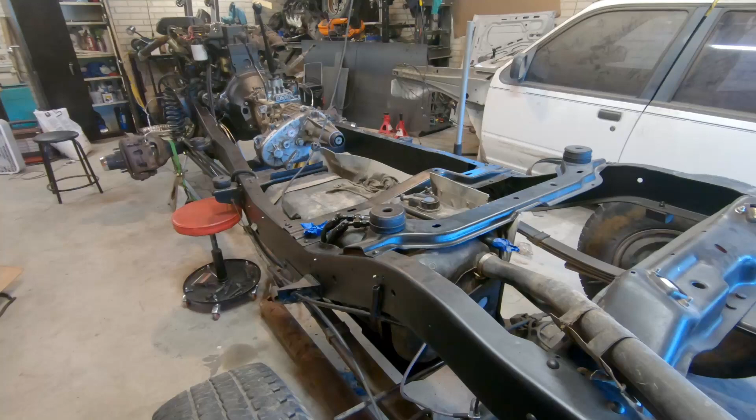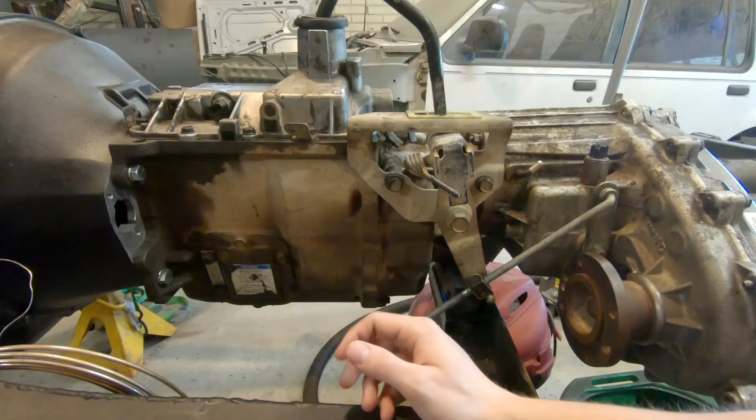This body has been off of that chassis for way too long. I think it's time we reunite the two so it can stop taking up 2 spaces in my garage. I already know there's going to be a couple issues with trying to do this though.

First off, this shifter doesn't quite work. I've got 4 low, neutral, 2-wheel drive, but I can't quite get this all the way to 4-wheel drive. So that's the first problem with this shifter. Second of all, this shifter runs into the drive shaft. There's not enough room here for the shifter and the drive shaft. They're occupying the same space.

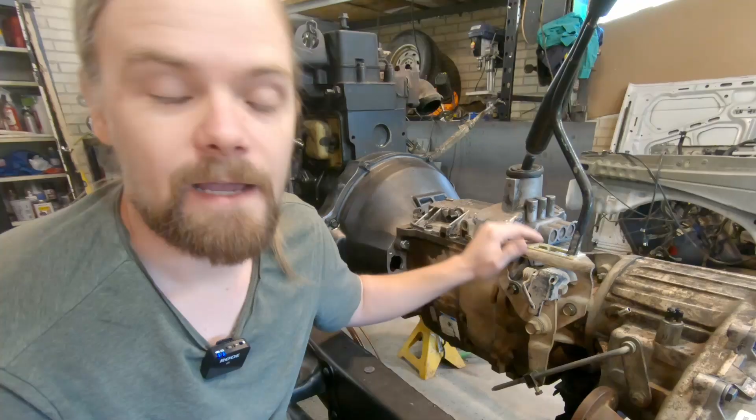So before I put the body on, I'm gonna fix this shifter because it's gonna be way easier to do now than when the whole thing's back together. I could just buy the correct shifter for this transfer case, but I've already got this one and I don't think it's gonna take that much to modify, so I'm just gonna modify this one. What I need to do is find a way to make this shift gate longer so that I can actually put it into 4 high, and then I need to bend this bracket. So let's get to work.

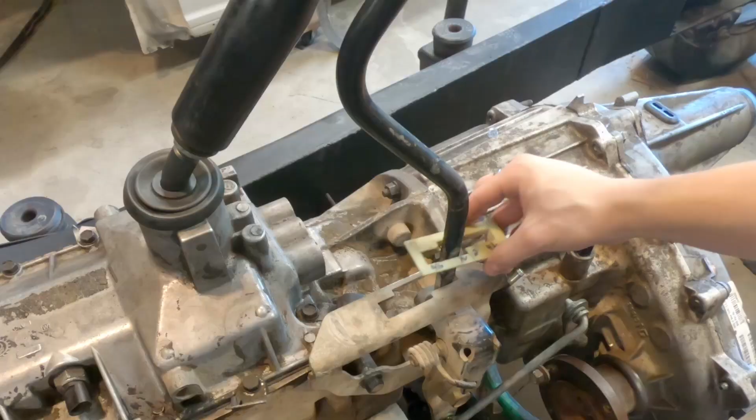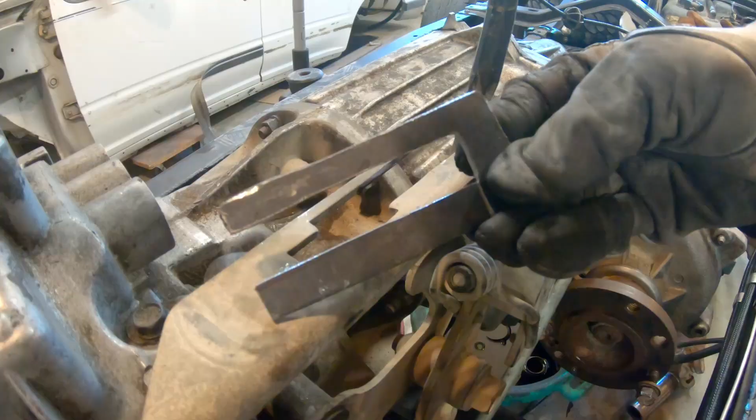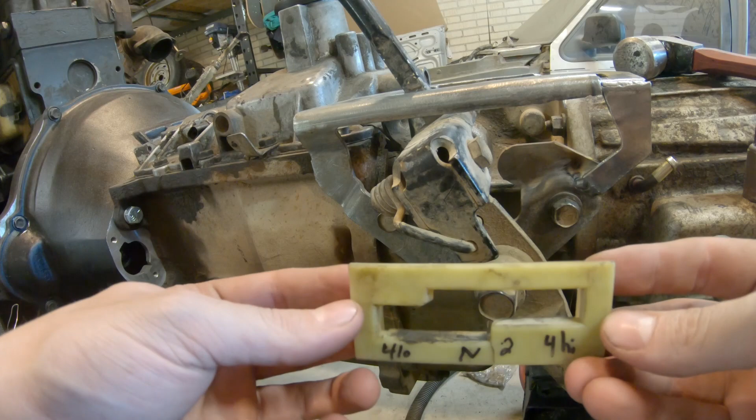Alright, so I welded on a couple new brackets onto this shift lever. The first one just extends this shift gate so that I can get all the way to the shift. And then I added an additional bracket here just to brace it, to make sure it's not too floppy and isn't going to have any issues. It's got a nice cutout in it so that the shift fork can rest in there fully. I need to bend this so that I have clearance, and I also need to look into making another one of these shift gate plastic pieces.

The shifter no longer hits the drive shaft. You can see there's quite a lot of clearance now. I shouldn't have to worry about that.

To finish off this shifter, I need a new one of these. This is the little bushing that when you're moving the shifter back and forth, it runs into this plastic thing so you're not just banging the shifter into the metal the whole time. I need one of these, but with this shift gate being much longer. So I need to figure out a way to make one.

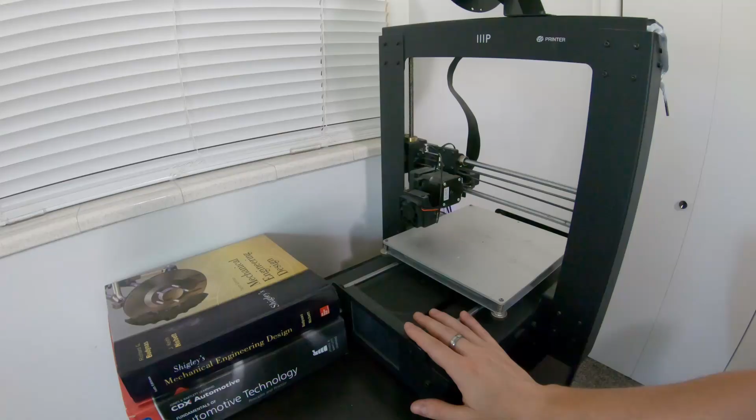And if you've been paying attention, you might have seen that sitting behind me in some of my videos. This isn't just a desk ornament, it's also a 3D printer. And to do weird shapes like this will be the perfect tool to make it.

Now, a couple quick things about 3D printers. First of all, the material that this is using is either a PLA or an ABS. This is really good for prototyping. It's really good for figuring out what shape I want the final part to be and to test it out and make it all fit.

But the final part that comes out of this is going to be made of PLA, and it's probably going to fall apart. In my opinion, a 3D printer like this is really good for making sure that you can get all your dimensions, so you can prototype parts, and so you can make sure your designs work. They're not all that good for finished products unless the product is purely cosmetic, like say a bezel for a screen or a gauge or something.

However, you can fix that. Once you've prototyped the part and you make sure it works, then you could take your models or even take the part you printed and take it to your local machine shop and say, hey, now I want this part in Delrin or some other actual engineering plastic that'll stand up to the abuse.

For my purposes right now, I'm going to print it in PLA and see if it works. And if it doesn't work, then I'll either get it machined, or even better, I can go online and find somebody who has an SLA printer which can print in thermosets and have them 3D print me the part. I might do a full video on 3D printers at some point because I do think they can be a useful tool for the shop, but you do have to manage your expectations as to what you're going to get out of these.

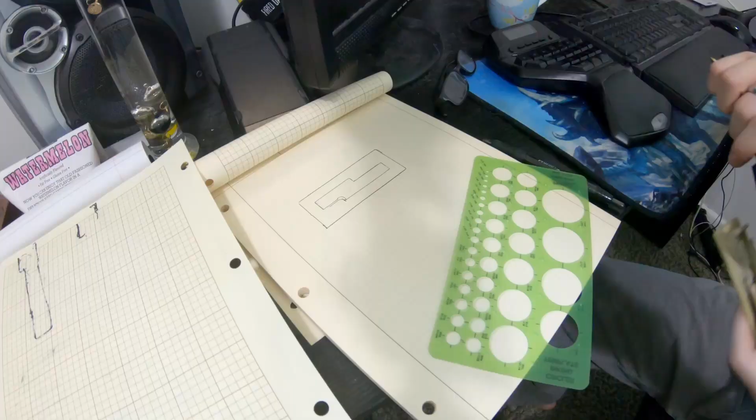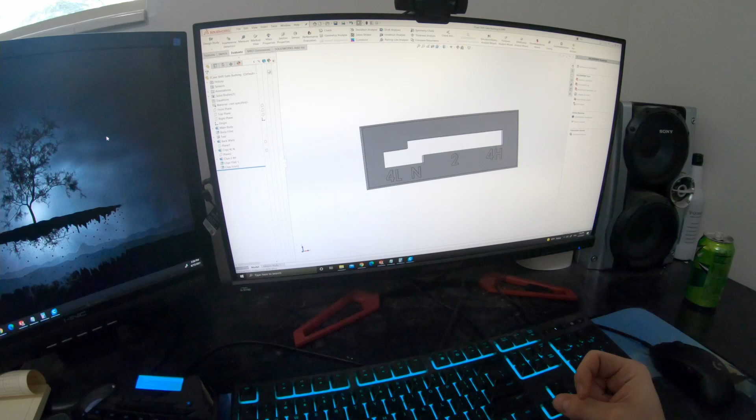So here's my part in CAD. I did it in SolidWorks. I wouldn't recommend SolidWorks because it's really expensive, but I would recommend something like Fusion 360, which is a fully kitted out CAD suite for free for hobbyists, which is an amazing deal. So if you're wanting to get into CAD, that's what I would recommend is Fusion 360.

I don't use it because I have so many hours in SolidWorks that it's just much quicker for me to do it this way. And one of the perks of having to work from home during a pandemic is you get to have nice engineering software on your computer.

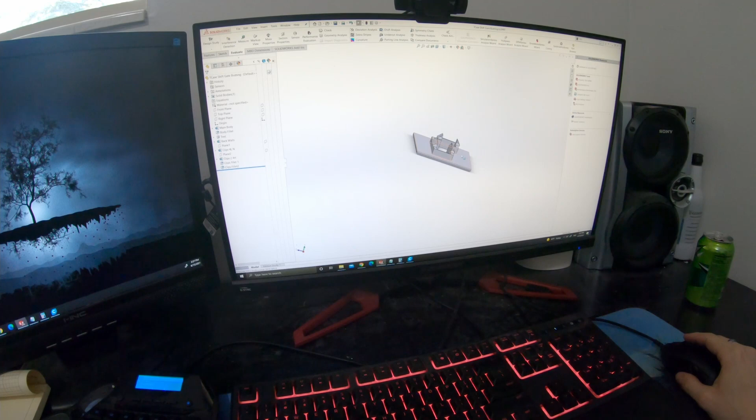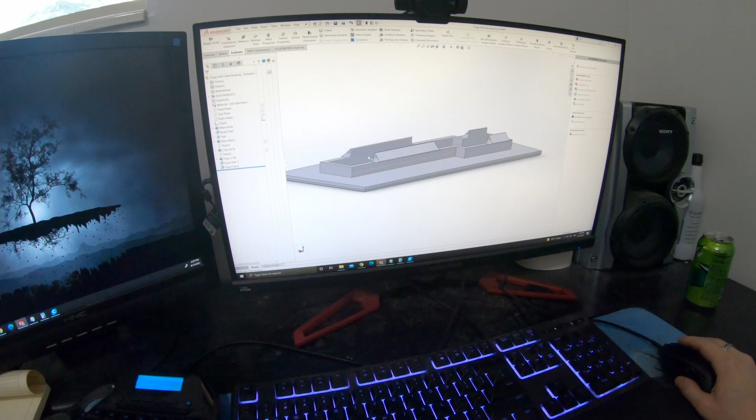So this is the model. You can see I have these little clips on the back. Little clips like this complicate a part by a huge degree. For example, because those clips are there, this would be a very hard part to machine, which means if your end goal is getting it machined, you might want to reconsider the way it mounts. Personally, I'd recommend just putting some holes in it and riveting it to the thing rather than trying to use clips. And the other issue is that you have to account for how rigid the plastic is and everything to make sure these clips have holding power and that they don't fall apart.

This is the part in SolidWorks. However, the 3D printer doesn't understand 3D models per se.

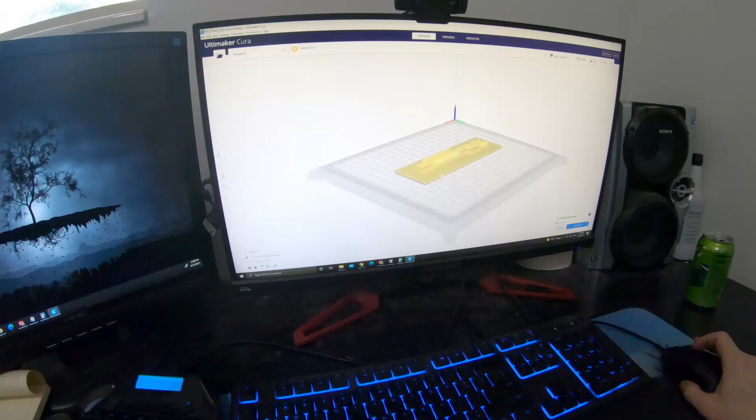First thing you have to do is make it into a mesh, which tells it where all your vertices and lines are, not exactly the shape of the model, and then it can understand that. Here it is in what's called the slicer. This takes the 3D model and turns it into machine instructions for the 3D printer so it can understand what it needs to do to make this part.

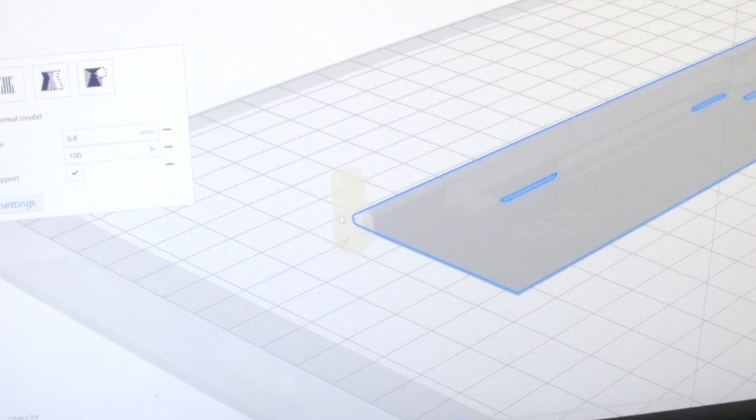The way the 3D printer works is it adds one layer at a time. It'll start here, this is the nozzle of the 3D printer, and it will draw out each individual layer one at a time, just drawing out every single line in liquid plastic. Then as it draws out every line, it adds a new layer and a new layer until you get your finished part.

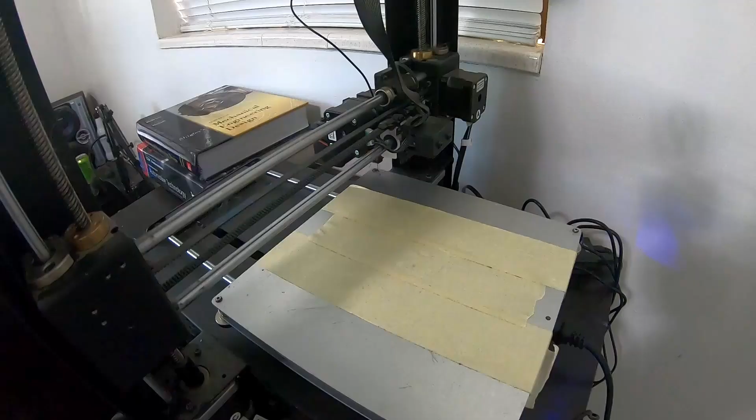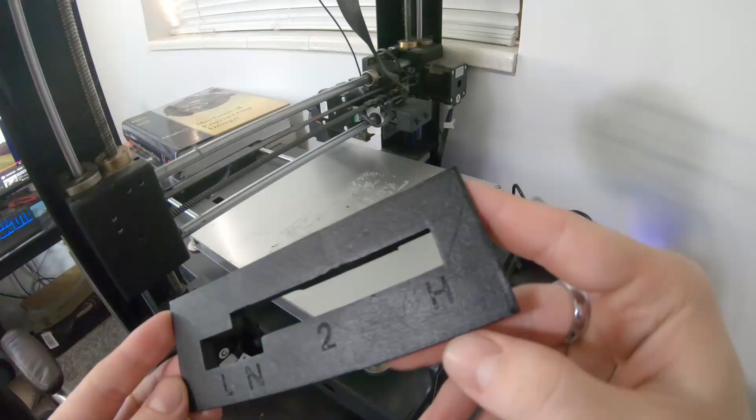Turned out all right. For some reason, the 4 is missing on the 4 low and the 4 high, but I'm just gonna have to paint it on or something, or just leave it, it's fine. You can see the difference between the old one and new one, it's kind of a lot.

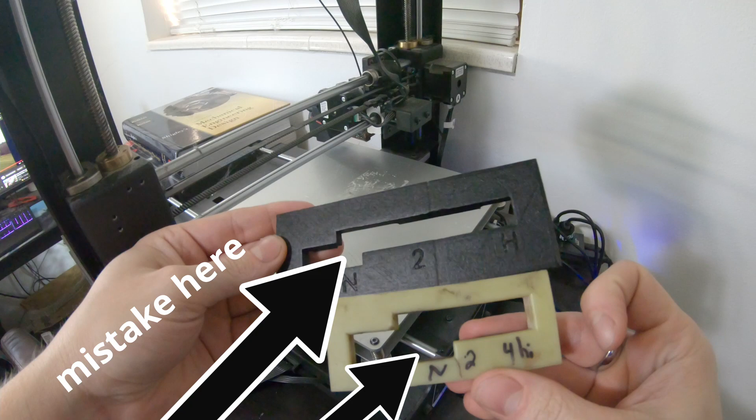All right, back in the garage, and here's this piece. Now, I've already noticed there's a couple issues with it. Like, for example, because of the way I welded on this bracket, there's a little step in the bracket. So I should have put a step in this bushing, but I didn't, so that'll have to come in V2.

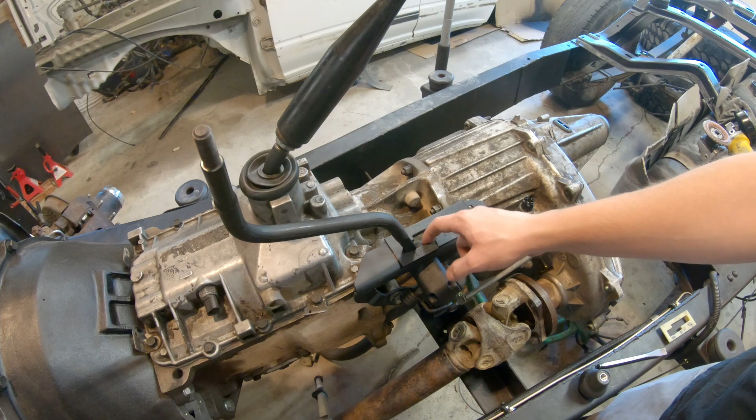Clips in good. All I need to do is reprint this, make this slot just a hair longer, and cut out that section there. This is why 3D printing is really good for prototyping, is because you notice small issues like that, and then you can correct them easily, and spend 50 cents on plastic to fix the issue, and then you know in the end that you have a design that will work properly.

What was this video supposed to be about again?

Oh yeah, the body. Let's start putting the body on. All right, I got the chassis as low as I can. The front, I got the flat tires on. The rear, I've got my shortest set of jack stands underneath it. The trick is going to be getting the body high enough to actually clear the rear, so let's see if we're able to.

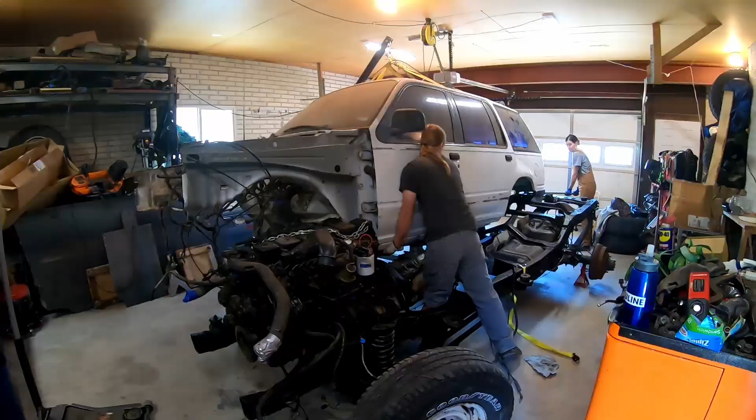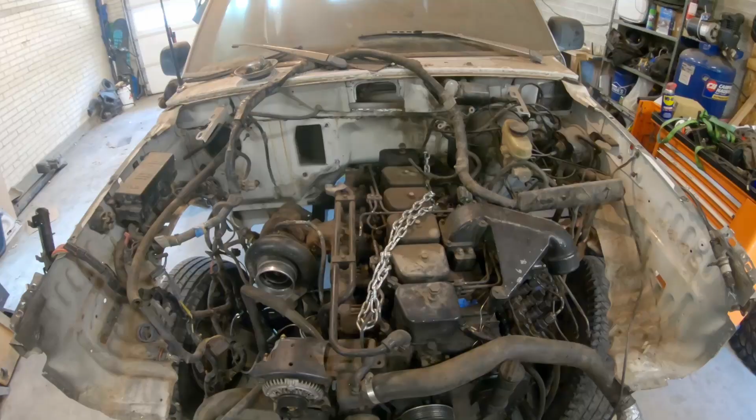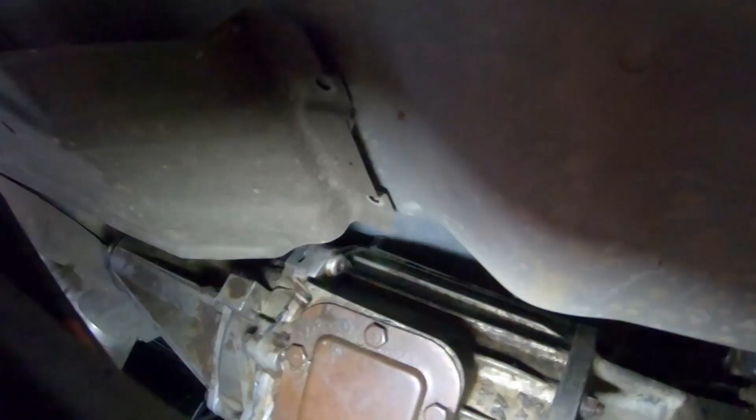All right, YouTube, let's give you an update of where we're at. As you can see, we're close, but this still needs to go down about 4 inches. And unfortunately, the transfer case is running into the transmission tunnel, so I am going to have to start cutting out the floor where the transfer case is to add some clearance to get the body all the way on. That's okay, I figured I'd probably have to do some cutting on the floor anyways, so let's get to it.

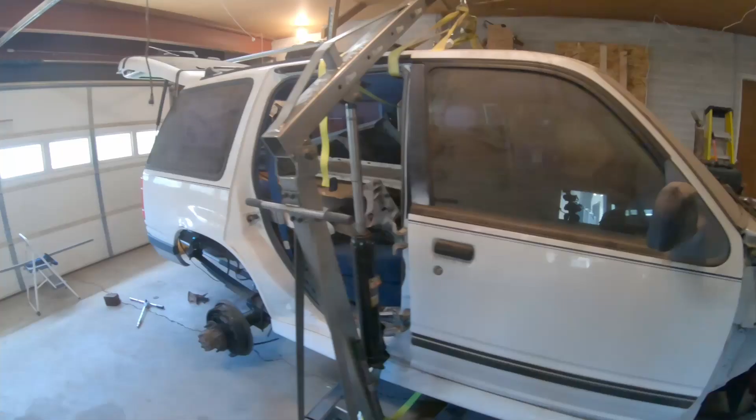As I've shown a couple times, it's possible to take a body off and put it on in your garage with a cherry picker. If you care about your body, I wouldn't recommend doing this, because I did end up scratching up the skirt there, and I did end up bending this guy down here and a couple things like that, but this is an off-road vehicle, I'm not too worried about some dents and scratches. But just thought I'd let you know, if you care about your body, maybe don't do it this way.

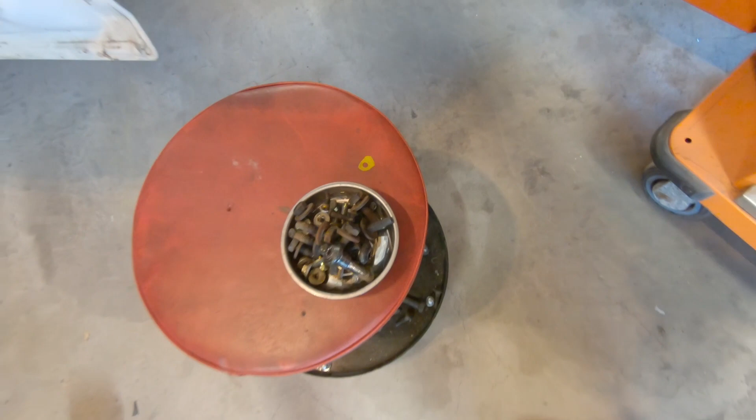All right, I got the seats out, got the center console out. I didn't show me doing that because honestly, I hate doing work like this, so I can't imagine you guys would want to watch it. It's basically just pulling out huge stacks of bolts and screws and clips, and you never know where any of them are at, it's fishing around, and yeah. Got the carpet pulled up, this is what it looks like.

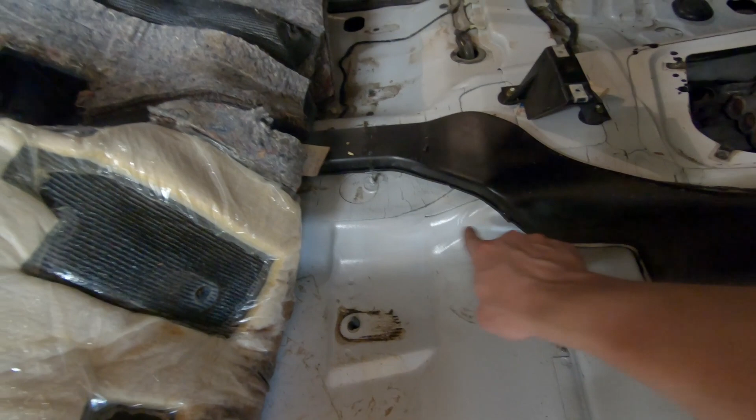It's time to cut some metal out of this tunnel right here so that the transfer case actually fits.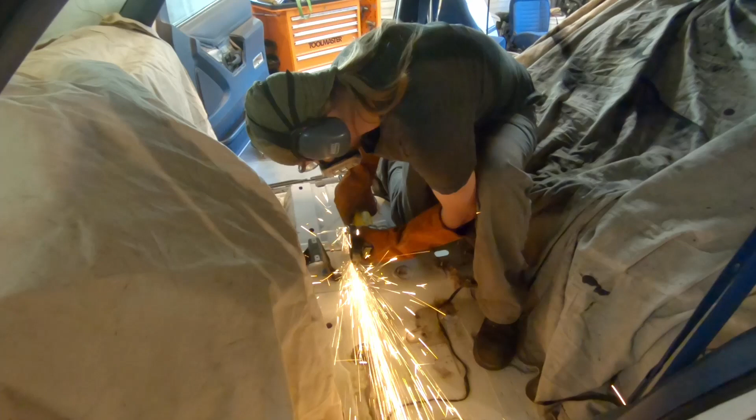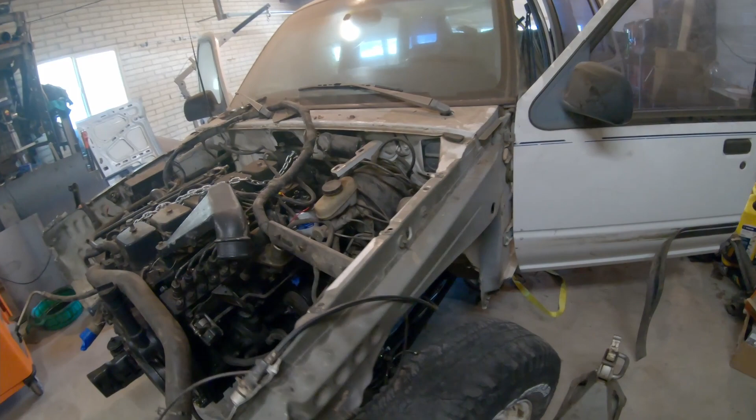The body is on, she fits. That is a Cummins and a Ford Explorer.

Got the front body bolts all bolted up, and I was able to do it with only 1 inch of body lift. Now, before I show you the interior, so that you see what I had to do to make this work, let me remind you that the first thing I ever did in this series was cut off the whole front end, so I'm not exactly afraid of doing damage to this body or anything. Take a look at what it took.

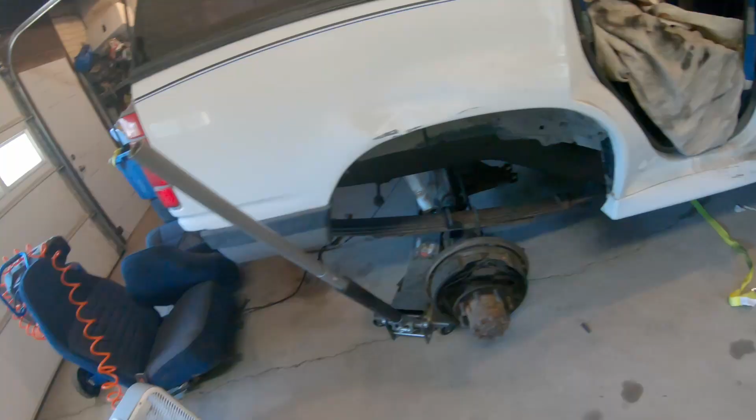An added bonus of this is that I can service the transmission and transfer case while I'm sitting in the driver's seat. I cut out a bunch of sheet metal here, and what I'm going to end up doing is fabricating a new transmission tunnel to cover up most of this.

This is how it turned out, lots of cutting. Now, granted, I probably could have gotten away with doing a lot less cutting if I just added a couple more inches of body lift, but I wanted to keep the center of gravity of this vehicle as low as reasonably possible, and it's an off-road vehicle, I don't mind having to cut into it. Other than having to move the front end forward, this is the biggest modification I had to make to the Explorer itself to make the Cummins actually physically fit.

There it is. I will fabricate a transmission tunnel to replace what I cut out, but that's going to be in a future video. For now, I was able to get the body on. The Cummins is officially in the Explorer, and that's what I wanted to do.